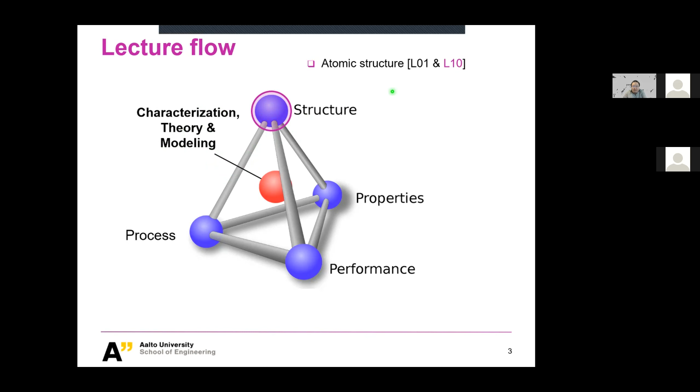All right, let me go a little bit fast forward here to get all the components out. Probably you are familiar with it already, but if you forget a little bit, don't worry. I will walk you through in the review lecture tomorrow or Thursday. As I said last week, we built this loop for you via metals for the past 4 to 5 weeks. Last week, we were solidifying things, especially concerning the structure and the property, with another material, a ceramic material. So that is one add-on we gave you.

And today is about another add-on, on the property part. We would like to strengthen a little bit the structure-property relationship, because this is more related to material science. And for the material engineering part, we believe with what you have learned from the lecture, it will be easy to find applications, to understand texts, and to study on your own.

So today we're focusing on another property, and it's about the physical properties. So we were speaking about mechanical properties, since it is, let's say, the main application of materials: to support structures, to build stuff. And actually there's not just the mechanical property, right? In the world, we still have a lot of other properties: thermal, electrical, optical, magnetic, and all these properties. So we will not cover all of them.

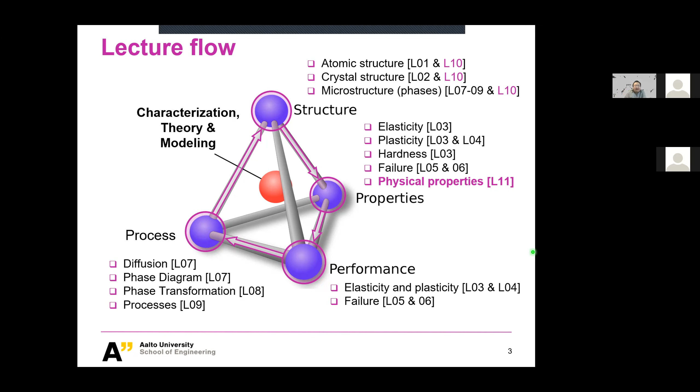We will today mainly focus on thermal and also a little bit about electric. And we will basically omit the optical and the magnetic properties. You could read on your own for those two parts, and we will not really talk about it. We will also not put it into an assignment or exam. So you should be rather focused on the thermal and the electric that we're gonna go through today together. All right, so that's the basic instruction of today's lecture, and we will begin with the thermal properties.

And these are the learning objectives. We basically have here 6 points. They're illustrating the keywords that you're gonna learn and you will be able to describe or understand. But they're actually categorized into 3 main categories. So the first part we're gonna learn is about the heat capacity. Maybe you know this word, I guess. And we will basically define it in a proper way. And to be more specific, we will define the specific heat capacity. And after the definition, that's about the characterization basically.

And then we're going to go to the theory. The theory is related to the mechanism. So what is the primary mechanism for heat capacity, because that is related to how the thermal energy is stored in our material. That is a new perspective you probably didn't know yet. Especially it is telling the essence of temperature. So what is really temperature? This could go really deep. It is very connected to quantum mechanics. We will scratch a little bit, not that deep, but you will really see some essential mechanisms about thermal energy and temperature to understand it better.

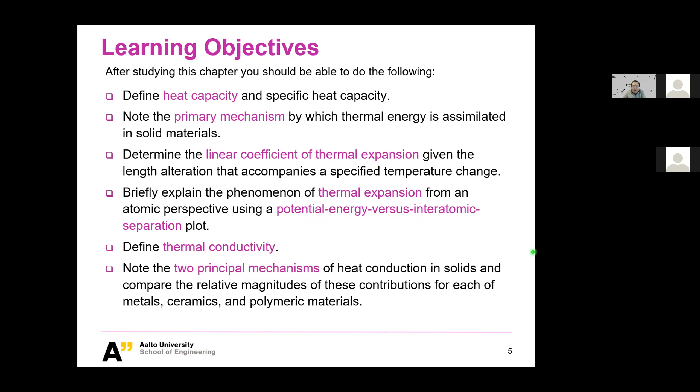All right, that's the opening of today's lecture on thermal properties. So here again, I'm trying to illustrate these three all together. They belong to the thermal property family. There's no need to define what a thermal property is. Basically anything related to temperature is called a thermal property.

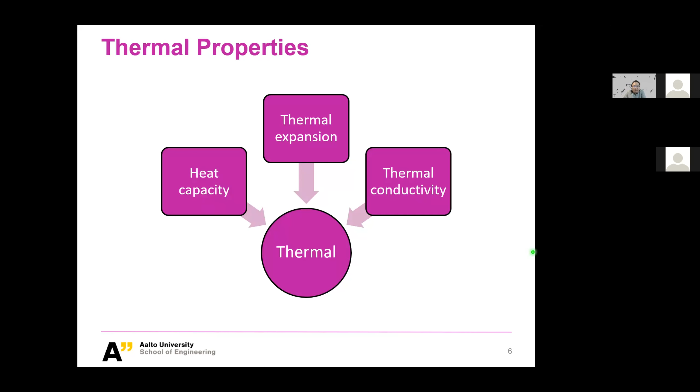All right, let's begin with heat capacity. So what is heat capacity? Heat capacity is the ability of a material to absorb heat. And that is simple. So first of all, we need to know what heat is. Heat is a kind of energy. Maybe you get a sense of it.

To describe the heat capacity, we already have an equation over here, and it is defined like this: the energy required to produce a unit rise in temperature for 1 mole of material. So this is the heat capacity of a material, or to be more specific, the specific heat capacity of a material. So the specific heat capacity of, let's say, steel is the energy required to produce 1 unit rise in temperature.

So 1 unit rise could be in degrees C or Kelvin. Actually, they're the same, just shifted. And for 1 mole of material, so it's a unit of material. Heat capacity is an extensive measure, but specific heat capacity is an intensive measure. So it is applied to unit material.

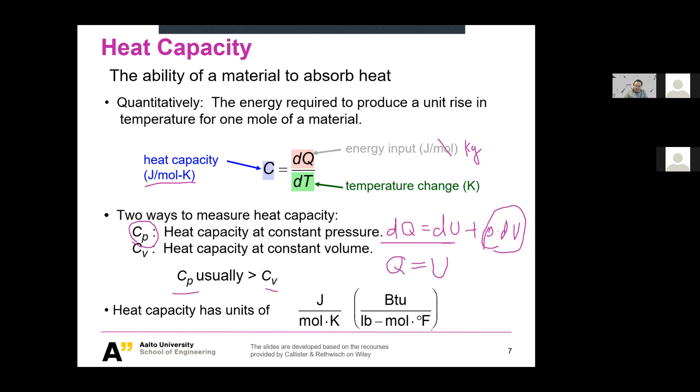All right. So that is about the heat capacity, and here is the unit once again. And if you are more familiar with the British system, this is what you get. All right, the heat or specific heat capacity is not a constant. It is rather dependent on temperature. So maybe you could also easily understand this, especially when I just gave you the mechanism about heat capacity and the essentials about temperature, you would understand better.

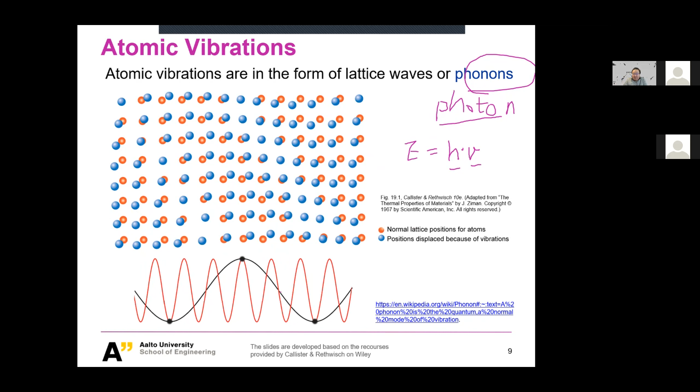And finally, I would like to give you a comparison of the specific heat. This is something you're probably less familiar with. So we have polymers as the winner here, with a specific heat of 1,000 or 2,000 or so. Followed by ceramics, and finally, metals. Maybe you feel like why this looks like a trend. So here, once again, we're talking about cp. Two slides before, we were talking about cv, but they're not significantly different from each other. We tend to formulate a constant for cv when the temperature is high enough.

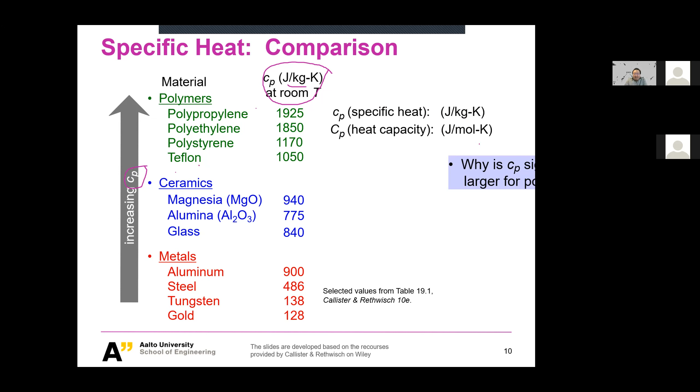Why do we have here such different values, even by an order of magnitude? What you should pay attention to is the unit. The unit we're talking about for cv is really per mole. But here, as I told you at the very beginning, in the engineering world we tend to use the density, we tend to use kilograms. And maybe you can now understand why they're different and why polymer has the largest specific heat capacity. Okay, that was my question. So that was enough about heat capacity. I hope everybody got it.

And now we move to the second concept, which is called thermal expansion. This is something you're probably very familiar with, and we don't need to explain the phenomenon in much detail, because if you still rely on the conventional thermometer, you know it very well. That is designed via the concept of thermal expansion, even linear thermal expansion. But here I would like to give you the equation to characterize it.

To characterize it, let's imagine we have a linear object. So this is the guy here. We don't care about the volume or the width; we only care about the length. Let's say this is the initial temperature, and we have the initial length. When we increase the temperature to a higher one, the final temperature, the length increases. So what is the equation governing this phenomenon?

It is like this. We take the final length minus the initial length and divide by the initial length, so this is important, divide by the initial length, and then we find a correlation with temperature. Here is one constant, alpha L, the so-called linear coefficient of thermal expansion, times the final temperature minus the initial temperature. So as you can see, here is delta T, and on the left-hand side we have delta L over what? Over L0.

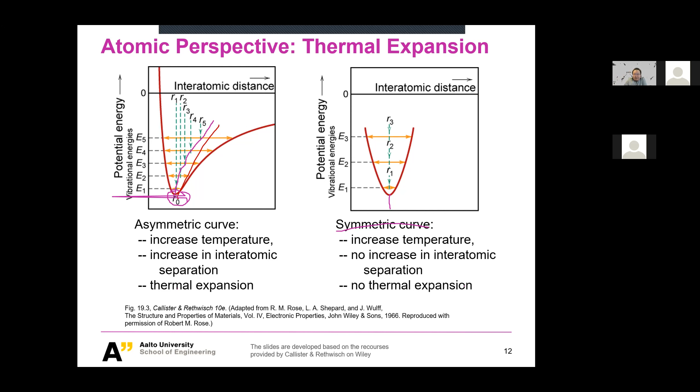And if I could give you maybe one more concept related to thermal expansion: here we're talking about linear thermal expansion. So this is alpha L. L is denoted here as linear thermal expansion. But in reality, we're not talking about linear objects, except for the thermometer here.

When we talk about engineering structures, we're more talking about the volume change, not just the length change. So in reality, what you see is alpha V, the volume coefficient of thermal expansion. And usually this value is 3 times larger than alpha L. All right. So that's enough about the mechanism of thermal expansion, and also the heat capacity.

Here I'm trying to give you a comparison between different engineering materials. Once again the polymer is leading with the highest thermal expansion, followed by metal, and finally ceramics. The thermal expansion is deep down really related to atomic bonding. There is indeed atomic vibration and also the asymmetry of the curve, but finally what decides is atomic bonding. In polymers, the bonding is the weakest, the weak secondary bonds. That's why they usually have a larger thermal expansion coefficient.

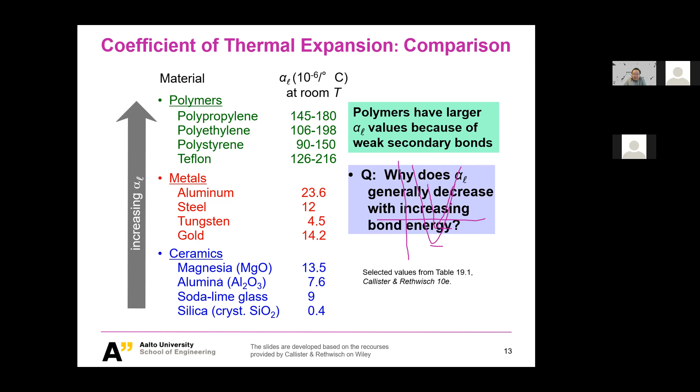Okay, I think now it is time for us to take a break. And when you're back, I'm going to give you one example about thermal expansion.

We talked about thermal expansion, and now I'd like to give you an example. The example is pretty simple, and you can imagine many engineering applications in your daily life. For example, a copper wire, which can be used for electricity. Or in skiing, we need wires to transport people from downhill to uphill, maybe not copper there, rather steel, but it's a wire.

So the example is a copper wire 15 meters long cooled from 40 degrees C to -9 degrees C. How much change in length will it experience? This is a quite important engineering design problem. When you end up with a job in product development, this is a concept you have to have during the design phase, especially for countries like Finland, where in hot summer we could experience at least 35 or so degrees C.

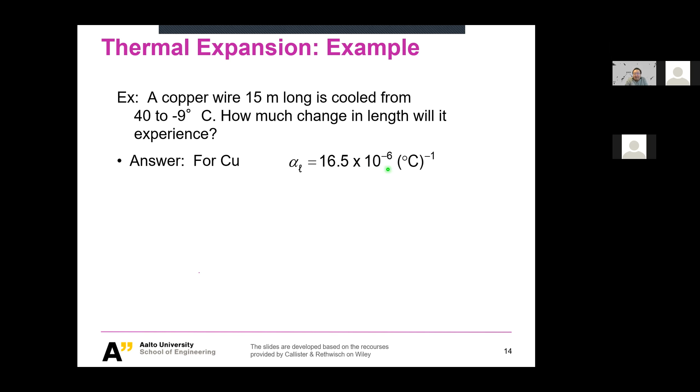And let's say we just use the equation, which is the simple one, because we're talking about the linear case. So the delta L is given by this equation. And if you just put everything into it, you will see the delta L is around 12 millimeters. 12 millimeters is pretty small compared to 15 meters, of course. But this is not something you could neglect. You will really see it.

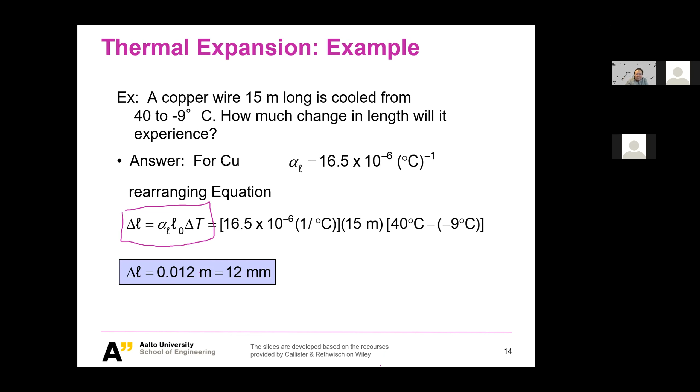It's close to the diameter of 1 cent. You can imagine that's not nothing. If you just neglect it, it could result in something significant. Why? Because a very important concept related to thermal expansion is so-called thermal stresses. Of course, thermal expansion could lead to other issues, especially when we talk about geometry and precision. But for engineering applications, the most important impact of thermal expansion is the thermal stresses introduced by it.

Maybe you can already imagine when we have wires going over a certain distance, and it is okay if the wire is just lying there without any force or restrictions on it. But just imagine if you want the wire to really keep straight and you already prescribe a tension to it. And if you design it in summer, and the wire goes from summer to winter, the contraction due to thermal contraction is going to develop tension, right?

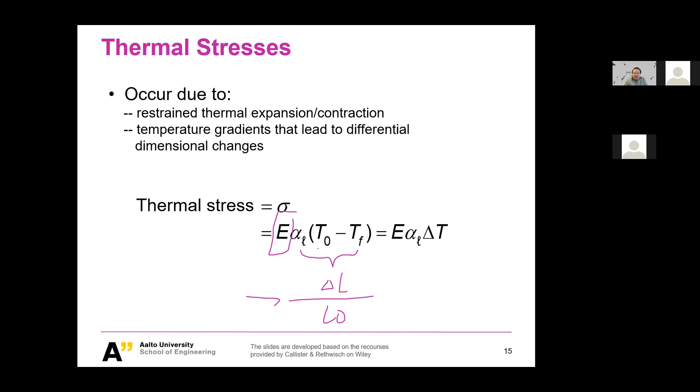For example, when we talk about steel, you remember when the temperature is low, we could have the ductile-brittle transition. And when we have the ductile-brittle transition, you really could have fracture in the elastic regime caused by thermal stresses. And now I would like to give you one example of this thermal stress-led failure.

And this is so-called thermal shock resistance. This is not just specific to wire. It is actually general to any material, because it is related to a heat treatment process, heating and cooling, especially when we do quenching with fast heating or cooling. Because that kind of fast heating or cooling usually induces a non-uniform temperature profile in our material.

Maybe you remember when we do quenching, the surface always has a larger temperature decrease than the center. So you probably have a higher temperature in the center and a rather low temperature at the surface. So if we try to make it abstract here, we split the temperature gradient into two layers. Let's say we have two materials, for example, the surface material is a coating and the substrate is another material.

And due to the quenching process or due to the material property, this one probably has a higher thermal expansion than the middle one, right? And you could really have a cool temperature at T2, but a rather high temperature at T1.

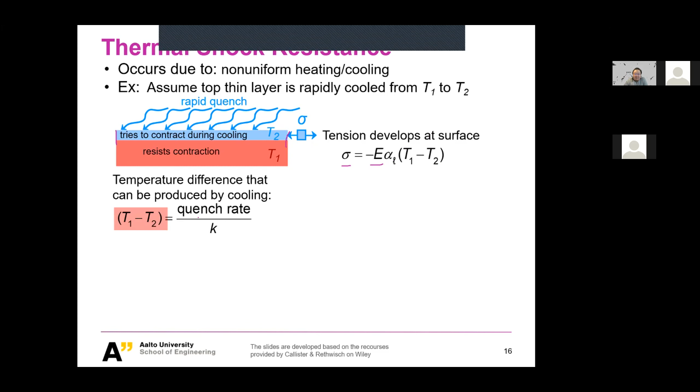So this is the so-called thermal stress. It is exactly related to the difference of the temperature, T1 minus T2, because we're talking about relative ones now. And how is this temperature related to the process? If we make a very fast quenching, so the temperature change is very fast, T1 minus T2 will be larger, right?

And if it is so slow, in the dream case where the quenching rate is so small that it's almost isothermal cooling, you would have no difference. So you will not develop any thermal stresses or thermal gradient. So that means we have a proportional relationship between the temperature change and the quenching rate.

And as I just described, we would expect some fracture of the layer material, the surface material. Let's assume a rather simple case, but when we have cleavage fracture, this completely makes sense. So we set a critical stress sigma F, representing the failure stress, meaning when the material reaches sigma F, we will get fracture.

So if we put sigma F into this equation, you would derive a limit delta T. When T1 minus T2 reaches this value, sigma F divided by these two material constants, we will trigger fracture of the material. And T1 minus T2 is related to the quenching rate. So finally, the failure of the surface material is related to the quenching rate, right?

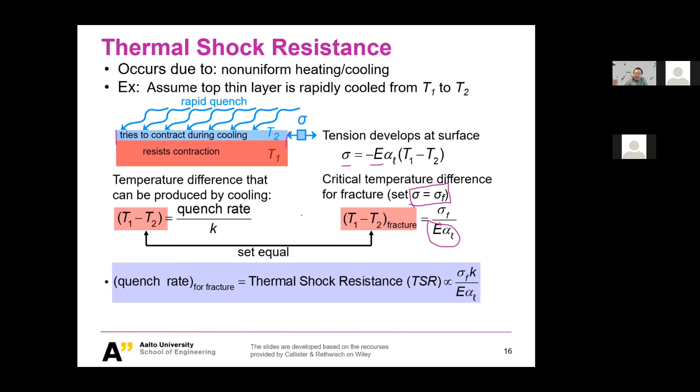That's why we have this so-called limit quenching rate, or thermal shock resistance, meaning we cannot apply an extreme quenching rate to our materials, because if the quenching rate is too high, it will trigger a fracture. This fracture is caused not by mechanical loading, but by thermal loading, by thermal stresses. All right, I hope everybody got it.

And this is very much related to product design. When you join a company in the future developing products or processes, you should always think about thermal expansion and the thermal gradient you might trigger, because that could lead to really detrimental events, for example fracture, related to thermal shock resistance.

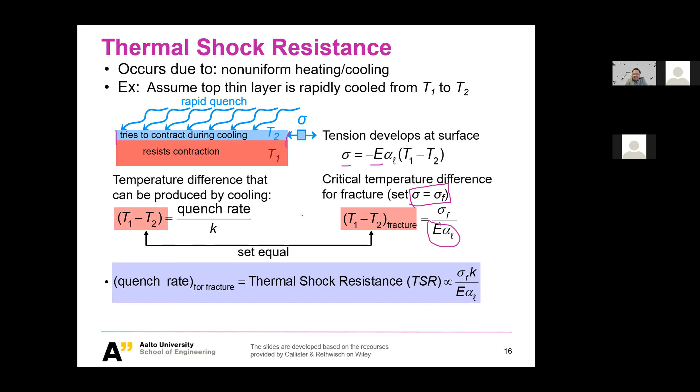All right, that is the basic topic of thermal expansion. As you can see, we invested the most time in it, because it is a really important topic for you. I hope you could get a sense of it, understand the equations to do the calculations, understand the mechanism, and finally apply the equations to guide your engineering design. The last topic about thermal properties is thermal conductivity.

This is something we will not elaborate on so much, because you might learn it in detail, I mean the students in the computational engineering subject. You will definitely learn this in detail in the thermodynamics and heat transfer course, which is designed exactly for that. We will give you some basic knowledge here so you can get a sense of it and, most importantly, connect it to something you have learned.

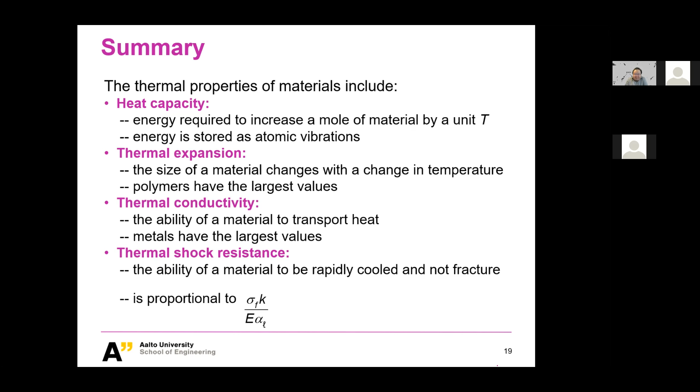We have a little bit of emphasis on thermal expansion because there we gave you most knowledge about calculation, as this is a very engineering-related topic. So you're asked to master it a little bit more than the other two in our course. All right, but in general, that was all about thermal properties.

And now we move to electrical properties. Actually, this would be really a scratch on the surface. This is rather a little bit far for all of you in terms of your future development, and that's why we're not giving you details. So this is basically a simple recap of what you learned in high school, and then we try to elaborate that a little bit with this kind of flux theory.

So here's a list of the learning objectives. First of all is the famous Ohm's law. I think you know it already. But we will try to give you a redefinition of Ohm's law, so maybe you could have a better connection to what we just learned in the thermal properties. After that, we will define the electrical resistivity and conductivity. These are two important concepts when we talk about electrical properties. I think everybody knows what they mean qualitatively, and hopefully after this lecture, you will know the quantity representing these two properties.

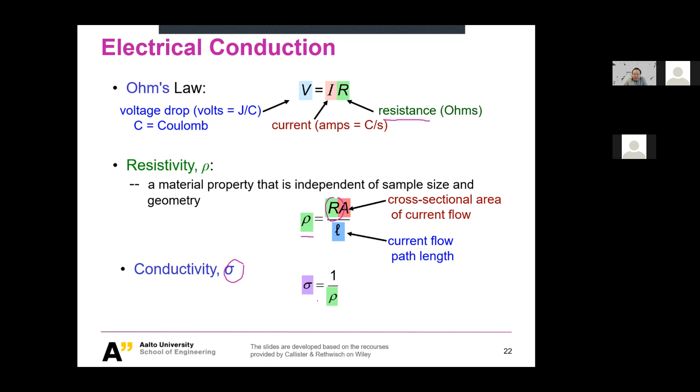And now we're going to give you a redefinition of Ohm's law, because we don't like using R, the resistance, which is an extensive measure that is sample geometry dependent. We want to give you a material dependent measure. So that's why we're going to redefine Ohm's law in a flux term. So here you can see J is not representing the current anymore, but actually it's a current flux. It is defined as the current I divided by a surface area, so divided by A.

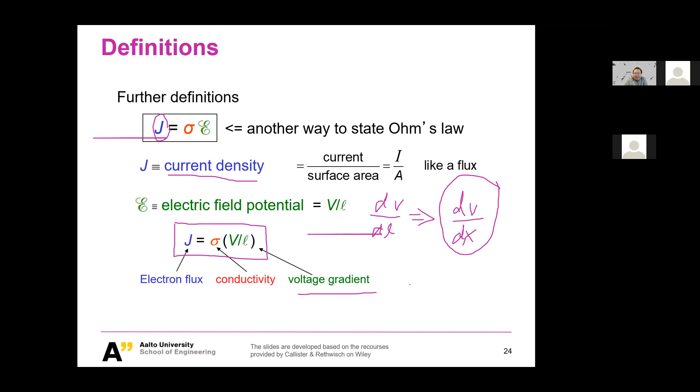So this is the so-called voltage gradient. So basically the driving force for electrical conductivity is the gradient of voltage, exactly the same as the gradient of temperature and the gradient of concentration. So they're all the same. All right. And now, as usual, we'll give you a comparison of the electrical conductivity of all the materials we have.

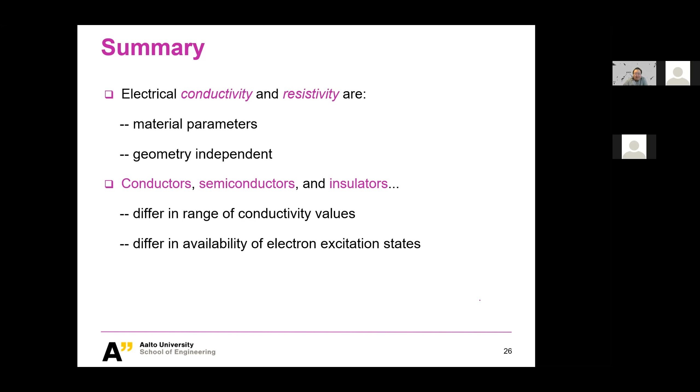All right, now it is time for me to give you a final overall picture of what we learned during these past 6 weeks. It's been really fast. You have to acknowledge that you have learned so much during the past 6 weeks. If you just imagine that tetrahedron I gave you, you touched every corner of it.

But what you could really take as an overall picture of this course doesn't mean that tetrahedral picture. Overall picture, meaning what you should really take when you go to daily life, even if you don't become, let's say, a material engineer or product engineer, you become something like a software engineer or so. And what you should think about this world from a material perspective.

I gave you the task to build a knife from really natural resources, raw materials in a way. That is actually already giving you really half of the perspective of materials. So here we call it cycle, because we need to think really at this moment about the sustainability of the environment and also the sustainability of our material use.

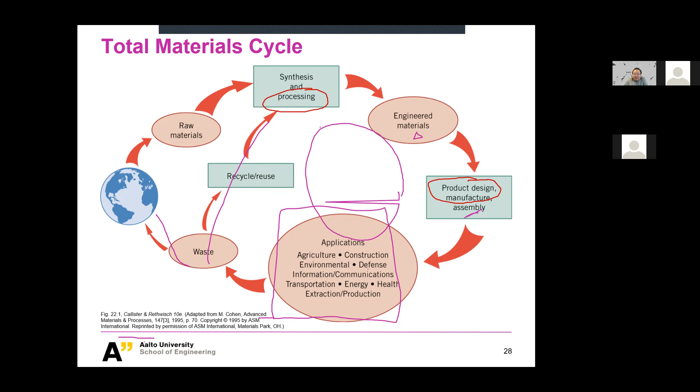So the much better way is we loop this circle in a really sustainable way, and we could get everything really running smoothly over here. And that is promoting this 3R. Maybe you haven't heard of it: the reduce. This is actually perfectly done in the Nordic countries, especially Finland. So basically we reduce our use of materials. We don't need that much material actually in our daily life.

And then we need to promote reuse. Reuse means we don't go to, let's say, the processes of making engineering materials. We directly go to the product development.

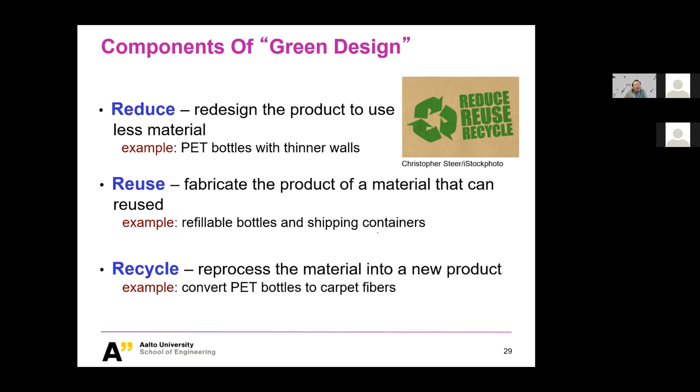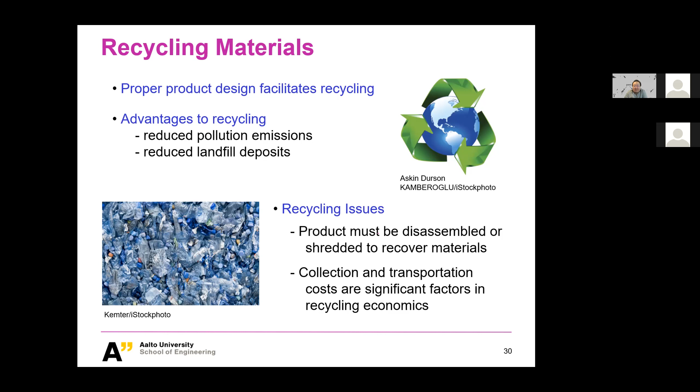So we reuse the waste or reuse the material we finish into a new kind of product and try to make a circle there. And the final recycle is we basically take our material back to the processing technology and reproduce engineering materials. Maybe you could find some very good applications of metals. So either steels or aluminums, they're really excellent recycled materials because you can recycle them with a very high ratio compared to plastics or polymers that we have, because they're hard. They're possible to be reused, but they're difficult to be recycled.

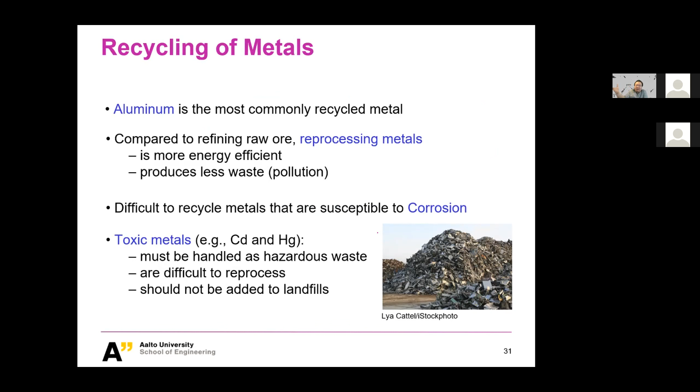All right, and also glasses. So we will basically just give you this as general information. The most important message for you is really, as a customer of this earth and of all these materials, keep in mind we try to build up this material cycle, to make the whole nation, the whole earth more sustainable and leave good resources for the generations after us.

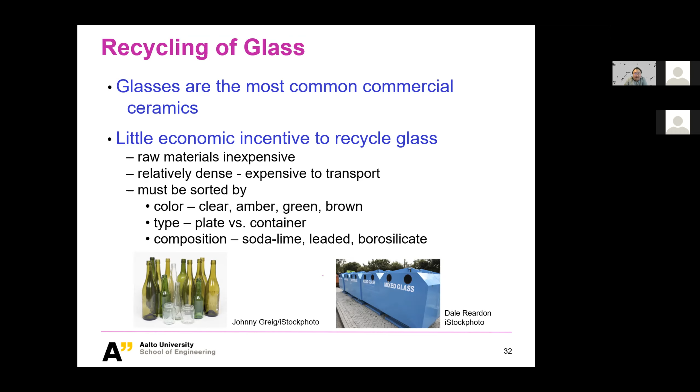The review lecture, I didn't write it here, but the review lecture will be delivered as a video. I think Wenqi and Rongfei gave you a kind of meta survey so that you could ask in that survey any questions or concepts where you don't feel comfortable and would like more elaboration. You could still do that by the end of today, because I'm going to make the recording of the review lecture tomorrow. You will have it before the Thursday exercise.